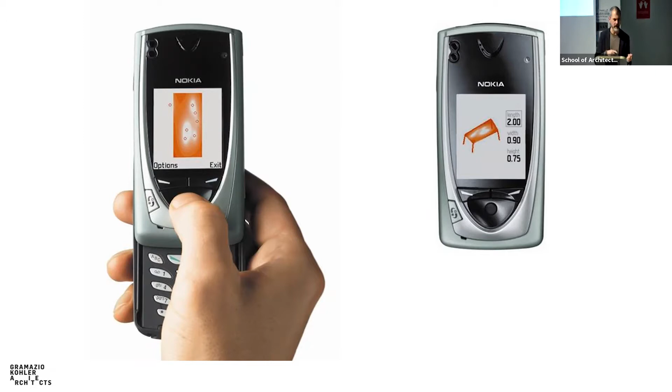And this is a mobile phone. Actually, this is a smartphone, the first smartphone, although it doesn't look like this. It's 2002. So no classical features of a smartphone, but it's programmable. This made the difference, because until this phone, a phone was allowing you to make phone calls, maybe play Snake, but that was it. And this one had apps. Of course, they were not called apps. Nokia didn't know what apps would eventually be. What is tragic, because they went out of business because of this, because somebody else came and invented the app, but they had it already.

And here I show you what this application that we programmed and distributed was allowing you to do. It had a 3D viewer, a very, very low res 3D viewer that allowed you to turn an object, a table, in space. And this would allow you to set points on a surface, and with the pressure of your thumb, to apply force on these points. And the force would, of course, deform the surface, and the deformation of the surface would at a certain point create a hole, just by an intersection between two surfaces.

So a set of very primitive operations in a very strange environment. We could have done this on a CAD program on a PC, but we decided for a minimal interface, for a device that was not felt as a computer, as a working tool, but as something else, something completely new. So you would eventually send this to our server. There was no cloud, so you had to send stuff to us, of course through the internet, but not printed out. But eventually you could have printed this out, because this is the beauty of this mechanism here.

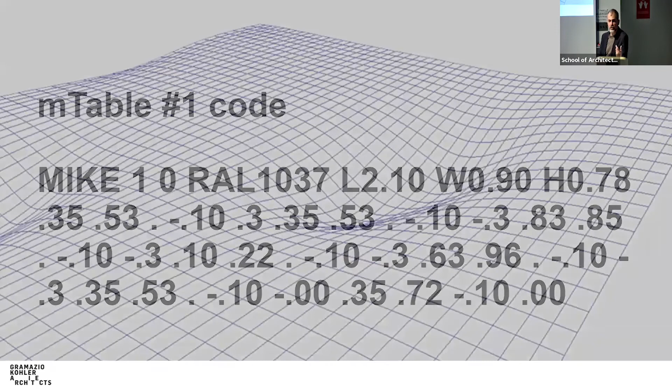These are the parameters to describe this object, the super complex object. And it's just a few, and they are even human readable. There is authorship, there are dimensions, there is then, of course, the XY position of these points and the magnitude applied on them. That's it. And with this information, if you have the algorithm, the rules of the game, the design, then you can reverse engineer this very complex mathematical description of a surface, of a NURB surface in this case.

And with a next step, that is also just a translation with a post-processor, you would produce machine code that will just cut this out of a piece of wood, walnut. So expensive, beautiful, heavy timber. And by doing this, you would add a few legs, and you would end up having these sorts of objects here that are unique pieces. Very elegant, beautiful, but at the same time, questioning themselves because they have holes.

And the whole point here was, or is, that these design features are not added by the designer. The designer gives somebody else tools to intervene in the form. So basically, this project is collapsing together a lot of points that back then, 20 years ago, were in the air: parametric design, configurators, the internet, the relationship between the author and eventually the client, that were, in our eyes, highly important to architecture and were not discussed at all, just ignored.

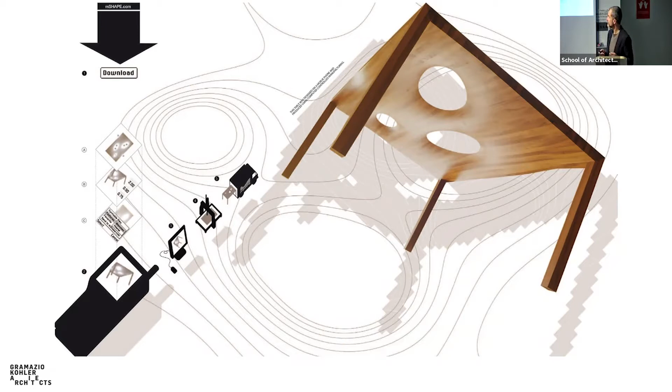So what did we have back then? We had digital architecture, experimenting with basically blobs, trying eventually to build them, not even so often. And then you would have everybody else that would just not care about the digital and its potential and its meaning for architecture. So here we closed this link in a very irritating and disturbing way, producing in the end a limited series of 10 tables, of course very expensive, but there were hundreds of unbuilt tables.

And this is a small cutout of this rest. Here you see, interestingly, that some are more elegant, more beautiful. Others are extremely ugly.

Probably wouldn't even work, although we had a nice algorithm implemented that would check for structural sanity of the thing. But what is striking for us, and this was also the message or the result for us, is you give the freedom to clients or laymen of touching the form, which is normally what designers hate, but at the same time, because they all look almost similar, if you design on the algorithm, so just one level up on the rules, you keep all the control you always had as an architect.

So parametric design doesn't equal losing control over things, and this was the great fear a lot of architects and designers had when confronted with the digital that was entering their profession aggressively. On one side not understanding it fully technically, but also fearing losing control over what we traditionally do.

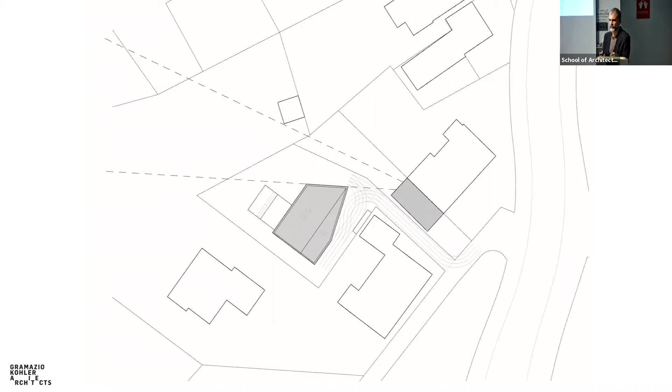You know, we can do this while eating, while talking, while taking a shower, while sketching. We don't need optimization. We can find a good solution. We can sell the good solution to the client with arguments, and that's it. Then we draw it up and build it.

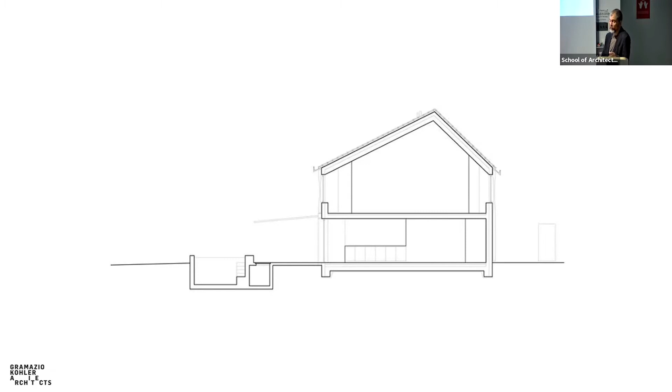Very simple. The slight small problem is the code doesn't allow any glass in this situation, or just a few windows, 1 square meter, vertical. This was what the client was looking for. So we used the trick that we already used a few times, and just cladded the whole house with vertical timber slats that would create the effect of a timber house, closed with no openings at all, but actually be completely open if looked at from the interior.

If you reason about this, you of course find out that this is sort of an engine, a perception, a viewing engine. It allows you to take a screen that is actually homogeneous, and to start to carve out portions of it that will, because it slims out, open up the field of view. So you play with the field of view. You play with very usual phenomena in architecture. So privacy, sunshade, what do you see, what do you hide, and so on and so forth. But it's not yet defined where and how. It's just a mechanism, just a parametric setup again that can be designed with.

Now, the small issue compared with the first parametric problem is that here we are talking about only 315 parts, which is ridiculously small as a number, but they all relate to each other, and they're all different in height, because it's not just a box, but a bit more complex box, and this roof is going up and down, and of course this processing of the parts is not related to an exterior drawing that you regularize, but it depends on the glass on the inside, on the spaces, on the program.

And here the only thing that you can do is to code. Just to be able to design it, you have to write down rules in a way the computer can interpret these rules and show you in real time or almost real time geometry that you as a designer can evaluate. Design being by nature an iterative process where you never know what you will end up with. The only thing you know is that you have to do something in order to be able to assess it and eventually change it. So trash it or improve it.

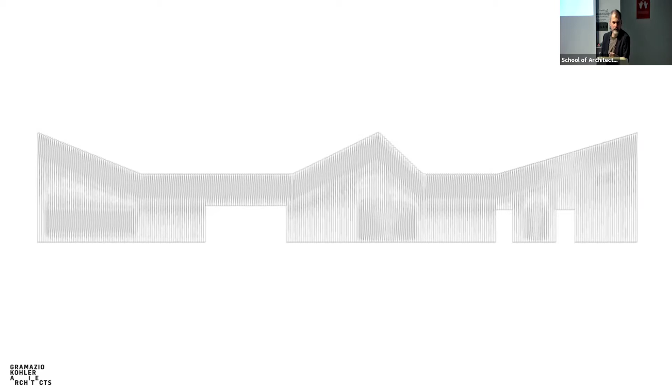Then it's clear that without programming, although we are all very good model builders, we also model in Rhino, we could model each one of these. Maybe we can be fast and do it in 5 minutes, but add up 5 minutes by 315 and then multiply this by 300. You find out you will not be able to design the way we are used to design. You would have to impose the system and a different logic that has nothing to do with the thing that you're looking for. And 315 is a small number. Okay.

And the second problem then is, how do you build this? Because if you have 315 parts, assuming that you have produced the data somehow by programming or by spending 3 months iterating, then if you would ask a contractor to produce these parts, he would say, okay, these are custom parts. This will cost a lot of money because for each single part, I have to measure them in and whatever.

Here's where the machine comes in. We had to find a machine that does exactly this and is controlled by digital data. And this is a machine that is very common, because if you order 315 identical slats of a certain height, they will pass them through this machine, because this machine is doing nothing else than cutting down the surface. First it makes it planar, giving the right height. And the second thing the machine does, because it's able to tilt this blade.

Second thing it does, it can incline the surface. It's extremely easy. Now, what is the consequence of this machine? It's that doing this with the data in it, processed with data, or not processed, costs exactly the same amount of money. I mean, I'm exaggerating a bit because there is logistics, but conceptually, it's the same thing. If you paint this stuff, then you need the paint. So you need to buy additional material that you put on it. So there is work that, if you buy it unpainted, is not there.

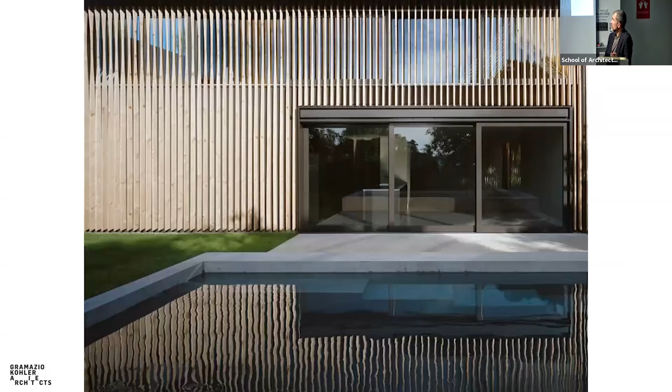Here it's the same machine. The only difference is the data that goes along with it. This is the result. It's very, very simple. And basically it's a perception machine. You experience it in moving through these spaces, seeing where it goes up and down.

Hey, Branko. Hey, nice to see you.

Okay, this was sort of the introduction, just to clarify where we come from, what interests us, what was the motivation to go where we are now, to start playing around with robots. This is then the next chapter, because this is not very conventional. It's implying a lot of nasty technical stuff that often you wouldn't want to do or to know, but the intrinsic motivation is exactly there. How can we transform architecture by making use of the data that is around us anyway, in the most elegant possible way, by instrumentalizing machines and our ability to describe processes.

Okay, now the robot. This is a few years now. I mean, it's about the same time, but in another context. This now is research. This is university, where we started in 2005 by buying this machine. And this machine is an industrial robot. So it's not particularly high tech, even back then. It's a mass-produced tool that has actually changed the way things are being manufactured. Cars, for example, cars we buy now wouldn't even be thinkable without these machines that started to be developed in this industry since the 50s.

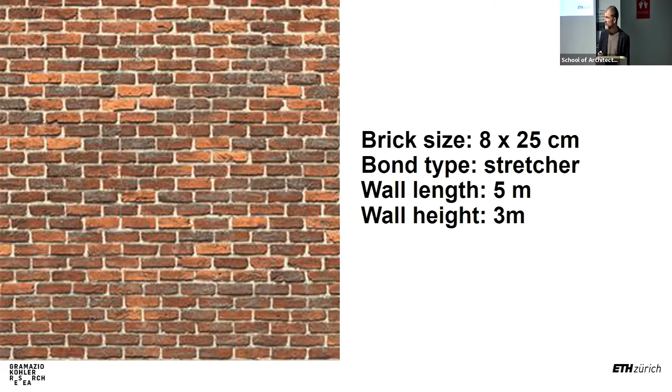And this is a cultural technological convention, the so-called bond type. There are many of them, more or less exotic, and stretcher is something every architect, but also every mason, knows; it's common knowledge. And stretcher just describes the rules, the process of how these bricks are organized and laid in space, so the position, but also the sequence. And this allows you to describe the whole thing with just a few additional parameters, the most important being the part to be used, the brick, and the dimensions of the wall. That's it. Extremely compressed, and there are not many misunderstandings compared with this one. And it's also not so hard to draw.

Okay, now what is the parallel of this tiny compressed notation in the digital, in an algorithmic space? For those of you that don't write algorithms but program visually with Grasshopper, this maybe is not trivial to read, but this is just two nested loops. The loop is one of the basic control structures in all programming languages you can imagine. And if you nest two, one into the other, then you repeat an action a certain number of times in the inner loop.

Once this is done, the outer loop runs, and this allows you basically to mirror what the mason does, because what the algorithm does is put brick next to brick next to brick until you have reached the length of the wall, then move up to the next level, shift by half a brick, and repeat. And repeating these two processes brings you to the finished wall. And this is not very exciting. It gets exciting if you look at this. Now this is the same algorithm, but there has been a small modification down here.

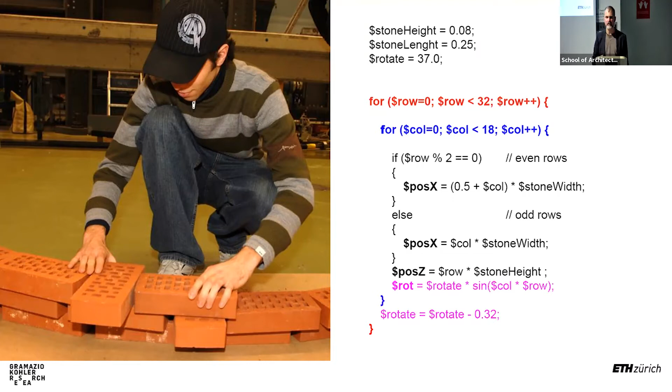The human now is on the left. The human is playing around with real bricks in space, wants to understand: can you eventually rotate? What can you do with these things? When do things collide? And then he writes these two very easy lines in the algorithm that is identical to the algorithm we have seen before. But it changes it dramatically, because before it was just the same thing as the stretcher bond, just in another notation. Now it becomes this, because it produces this output, and this is not a stretcher bond anymore.

I cannot go to a mason and tell him stretcher bond then does this. This is data, and it's so small because it's a lot. And for each brick you have a rotation. What is simple, but again, not easy if you have hundreds and thousands and hundred thousands of them. How do you describe it? So it's actually non-feasible anymore for a human, or at least not under efficient, architectural conditions.

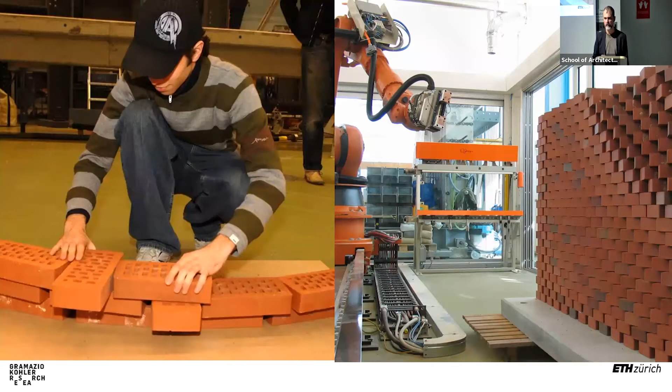But now this is the small trick to understand the relationship. The machine is expecting nothing else than this, different numbers, and the machine doesn't care if the numbers are all identical or all different. Does not notice it. This is the strength of the machine. And by directly coupling these two things, and this is now just one possible variant of this relationship, but it's a strong one,

we are able to directly link the human designing something, what means in this case to code to some extent, with the machinic act of constructing something, by leveraging on the fact that the machine doesn't care about what for us looks like complexity, but for the machine this is just simple. What is impossible for the machine is to understand what a stretcher bond is.

And what is also important for us is that digital materiality doesn't have to be, but often it's a very central thing, because it's not the digital world as we knew about these things already in the 90s, which was computer graphics. But this is just color on paper. Here these things interact with light. They are purely, genuinely architectural.

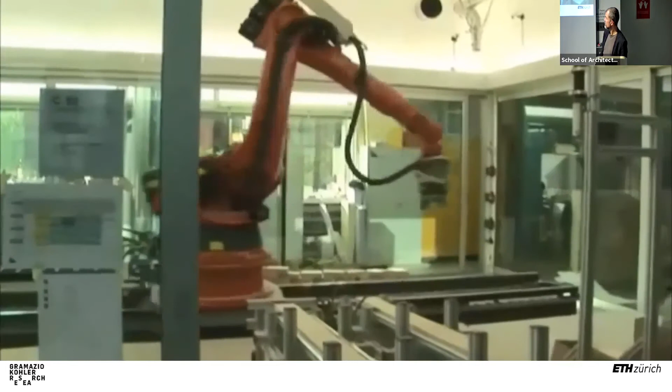We produced this at university. It was sort of a stunt because there are issues of liability and all those things, but sometimes you just have to do things even if they are not so clean, just because otherwise you would not do them.

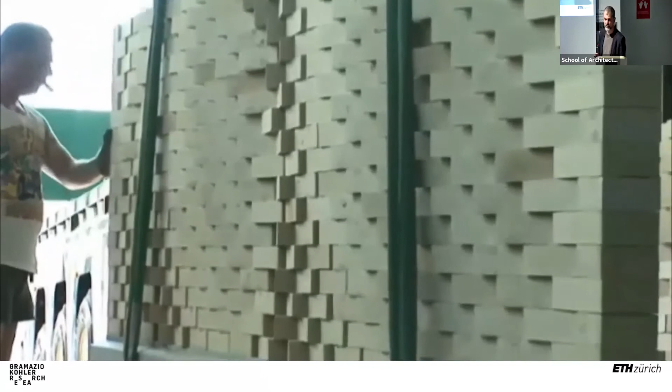Here you see, the process is super simple. The machine is placing them in space. It's a 3D printing process at a very, very low resolution. We used to say back then, just at the resolution of architecture, because the brick is an architectural element, and then these parts get placed, once they have been transported, just placed onto the skeleton of the building in a conventional prefabrication process.

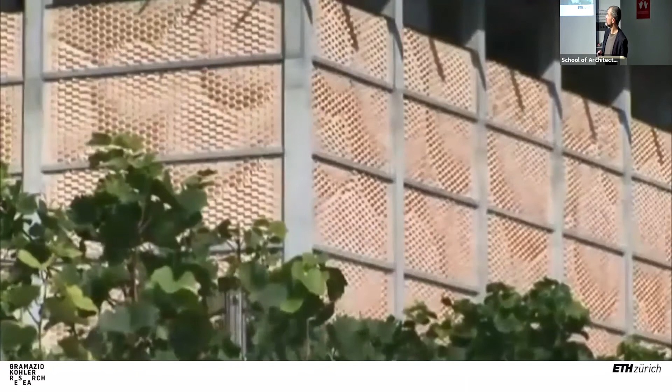Here are a few images. And just to remind, this is a building that is generated by light. This building changes all day long because the sun moves, and changes with the position of the observer, changes with the quality of the light, changes according to you being inside or outside. Because it's completely different physical phenomena that make it readable to your eye.

And the sequential roof is a project that is similar conceptually, although here these things become structural. It's a 2,300 square meter roof, like a canopy, for actually our institute's building. We were lucky, we got a new building, and we have been able to convince the board of the school to insert a small experiment. This is probably the only drawing that exists of this roof.

It's nicely showing that if you, at this scale, take 50,000 timber elements, 5 by 12 centimeters. I don't know now in inches. It's probably 2 inch by a little less than 4 or 5, something, I don't know. All of different dimension, and organize them in a proper way, so weave them in a proper way, you get a structure that is astonishing for us. That is consistent, but still malleable. Still stretchable. It's more like a fabric.

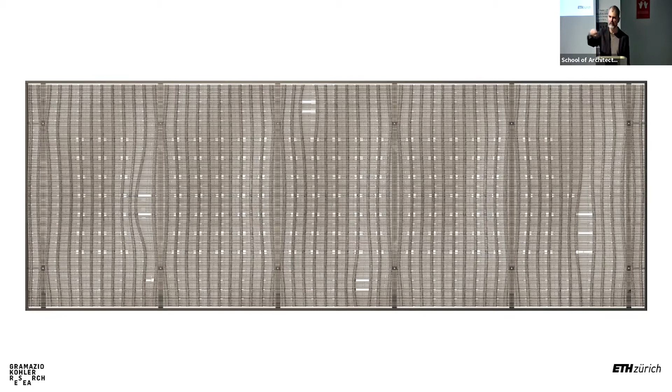That can adapt to special conditions. Like here, these are air ducts that have to cut through this thing. What you normally do is to cut out something from the structure, or have the structure running around such a situation. Here you just stretch it up, open it up, and have these things going through.

And again, 50,000 elements you have to program if you want to organize them, because before we were talking about 315, now it's 50,000. The only way to do it is to start from design rules. And this is now this part of the image. I will say, what are the things that I'm interested in? Which are the parts of the geometry that I want to control? How can I describe them? Can I describe them with lines that I can manipulate? Do I want to describe them numerically? Whatever.

And then departing from this information that you input, you start to build your design in the form of a program that then adds structure and eventually, and this is very important in these things, creates input data for structural engineers that can check on each iteration. Because otherwise the same problem would just be moved to the structural engineer; you cannot tell the structural engineer, I give you 3,000 models, and you model them in your structural engineering software, because it takes ages. So you have to connect these softwares in order to have this proof that it's working, or the information that it's not working and where it's not working, immediately. And then, at the end, it's classical BIM information where every screw is introduced.

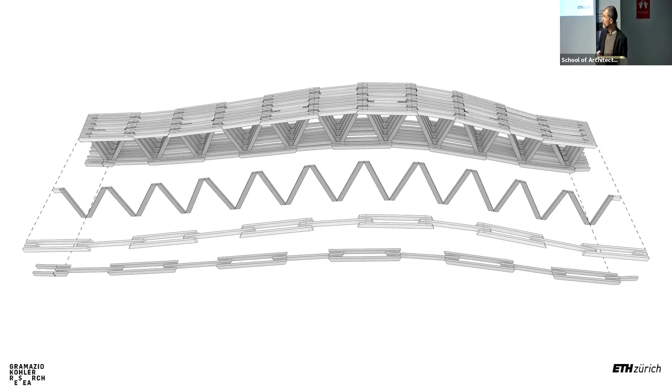The way this roof is built is pretty simple. It's big trusses made of small parts, 15 meters long, 1 meter wide, connected by almost 1 million nails. Now, the nail, this is a specific story, it's because the nail crosses two layers. So in order to avoid collisions here, you really need sophisticated algorithms that produce this information for the machine at the very end.

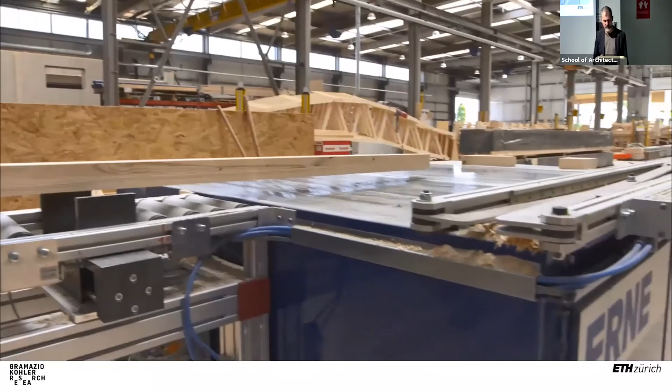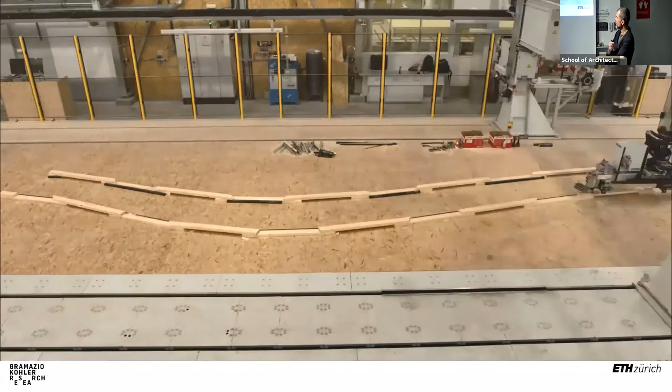To end up with a production process that is eventually as simple as the stacking of the bricks, because the only difference here is that the raw part, normally 6 meters long or longer, this slat is processed, cut at length and at a specific angle, and then laid out by just a big robot on a big table. And the robot has not only the ability to deposit these parts, but also to nail them down. So it turns the end effector and then has this very common tool on it. It is just a nail gun, and gives it the nail.

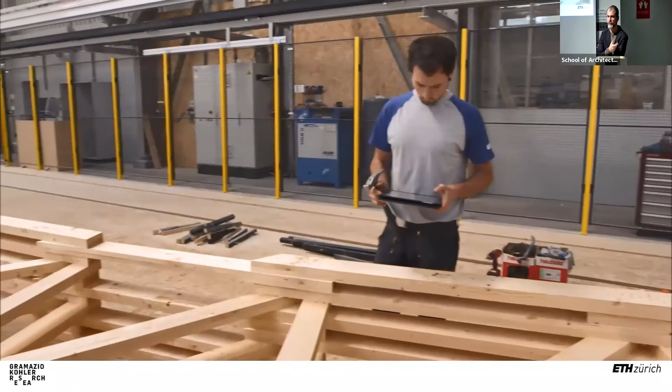And all this information has to be produced before, because this machine is not doing anything if you don't tell it where to nail. Because all of these geometries are different, or can be different, it means also that each connection has a specific number of nails and a specific position for those nails.

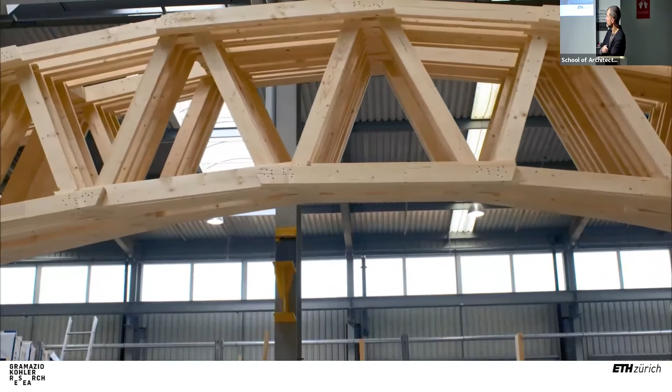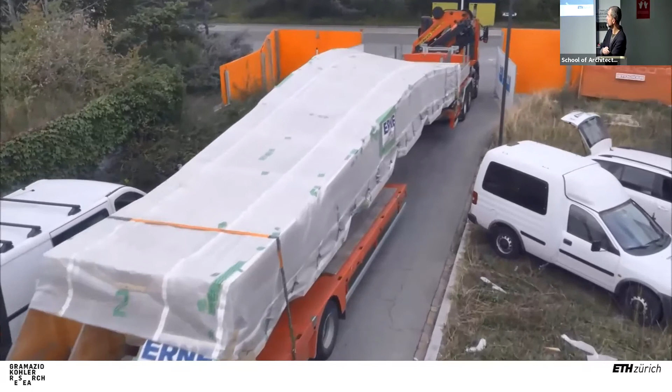And then at the end, these elements are craned away from the printing bed, installed. So all the subsystems can be installed, but it's very important here because if they're all different, then it's better if you can do this in the shop, transported to the building site, and then craned into position.

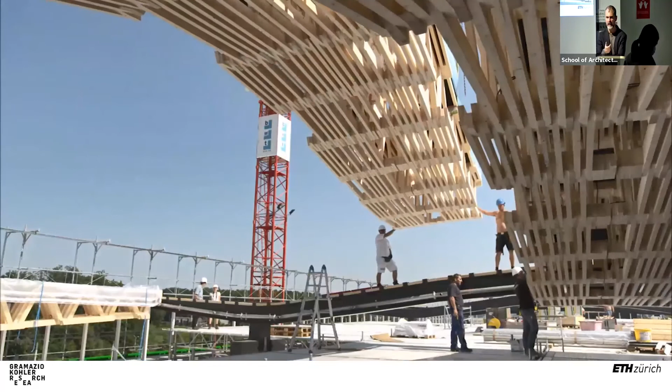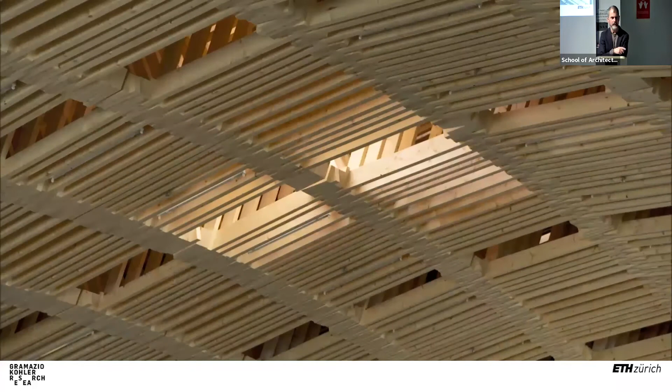And this last step is extremely simple because you cook down 50,000 parts, 1 million nails to 168 big elements that can be very simply placed and fixed with a few screws, and that's it. And all the subsystems are in. So it's really about condensing a large number of pieces with the help of algorithms in the design process and machines in order to simplify this last step that has to happen on site to a maximum.

Okay. Now, these were two projects that are not super old. The last one is maybe 5 years old. But I wanted to move one step forward from this and show you two projects that we looked at in the last 2 years that work with augmented reality. At a certain point, we realized, more by chance, because we had people in our group that were looking into these things,

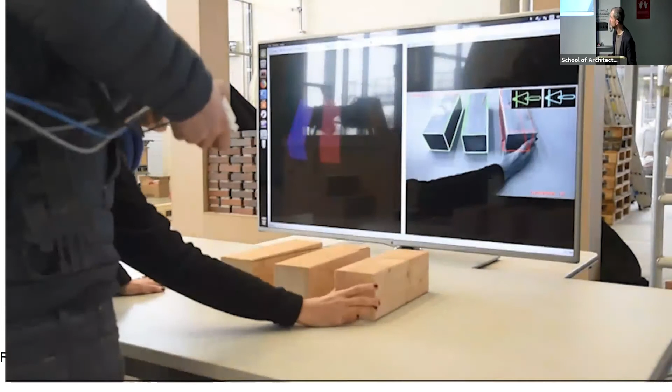that we had technologies that basically in principle do the same as Pokemon Go does, just project something in your visual space, so in your physical reality, but that with the right tools, the right sensors, the right camera and the right algorithms, by tracking the position of real objects in space and by extracting the features, so the edges, you would be able to build tools that could run on a screen like here or on goggles, it doesn't matter, that would allow you to guide the human to place parts in space.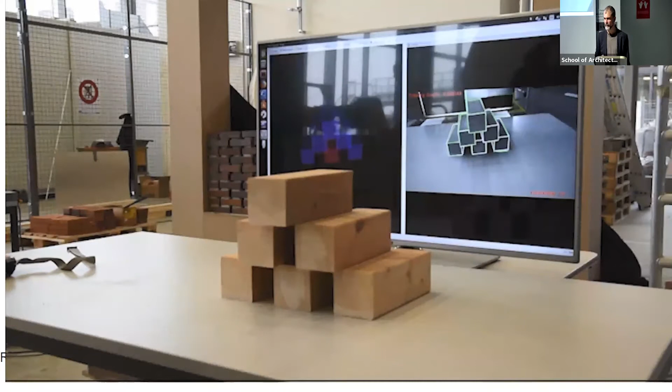And this is pretty radical, because now the difference we were discussing before between the human and the machine, where the machine is this tool that doesn't care about where things are in space, that doesn't have to measure, here changes. It just becomes a more complex matrix, because suddenly the human too is able to do the same thing, just by being instructed by technology, by a machine.

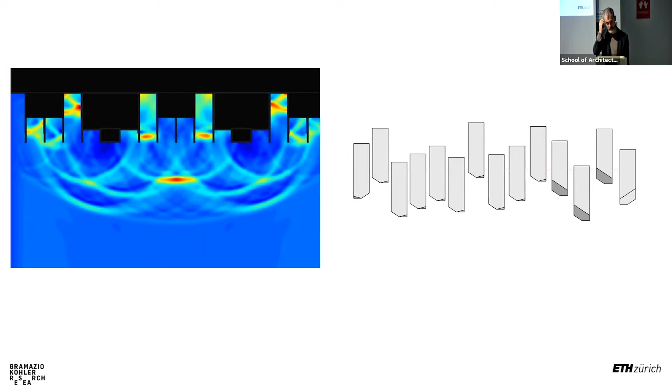So eventually we did the first project that was fairly simple as a proof of concept. It's a diffuser, an acoustic wall. We designed a timber piece. It's one piece that can be rotated in 4 positions. A diffuser works with depth. So you basically create depth pockets where the reverberation of the sound is just not synchronous anymore. So the sound comes back from different distances depending on the wavelength. This creates a phenomenon that is pretty important and interesting.

And then we add again an algorithm organizing these produced parts in space. And then this was an extremely interesting experiment with people, not with our group, which would be completely biased, but with people that normally do this kind of thing, giving them these very simple tools, a camera and a screen, with which they could start to deal with the data on the left that otherwise would be prohibitively complex and slow. And we were able to produce this as a proof of concept fairly quickly and in a simple way.

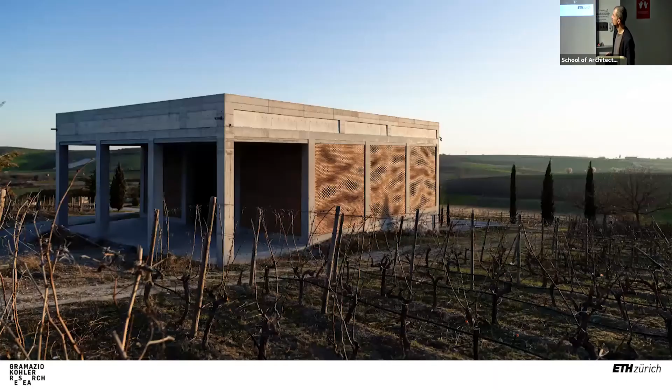And with this proof of concept, we transitioned to a second project that by chance came in at the same time. This is a winery in Greece. And the very interesting thing about this winery in Greece is that it looks very similar to the winery we already did. It's a concrete skeleton. The bricks are fillers. The bricks are screens, where air has to go through, but not direct light.

There were even more parallels. The client here was also an engineer, like the first one, Gantenbein. So somebody that changes profession and starts to produce, in the case of Gantenbein, excellent wine. These guys here are starting, but I think they're ambitious. But the big or small difference is while Gantenbein was produced in Switzerland by a robot, this was produced in Greece on site by masons. And if you look closely, you see in this design here we have features. For example, we have mortar.

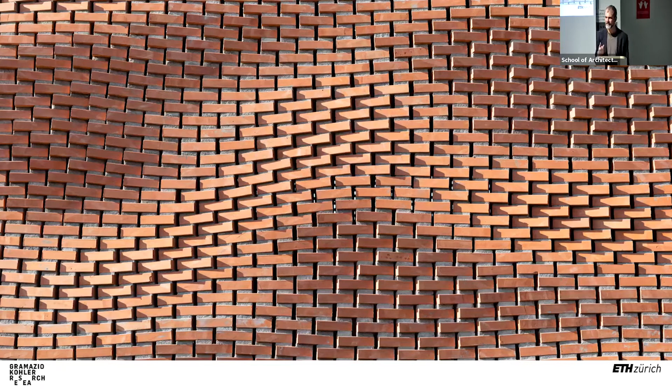Gantenbein didn't have mortar for a simple reason: a robot is not able to put mortar on a brick. This is an extremely complex craft. This is dexterity. This is knowledge. And so we had to simplify, to abstract this process. It was nice. It was like a dry wall, with glue, questionable.

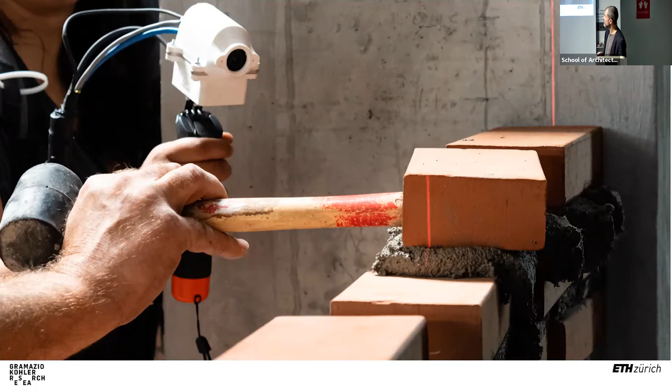And with this process here, by being able to use the mason and his knowledge and craft, we have been able to reintroduce the mortar and even push it one step further by starting to modulate the amount of mortar. Here you see the working setup. Of course, it's very experimental. The whole hardware was just prototypical, but it worked.

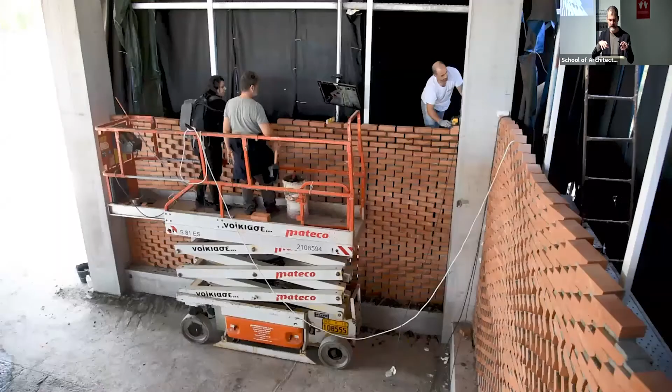We were able to provide the mason with all the information he was missing, sort of to adapt the interface in a way that it would fit to the technique. They place the mortar, then they place the brick. You will see it here, yes. And then, with a best guess, they place the brick on it.

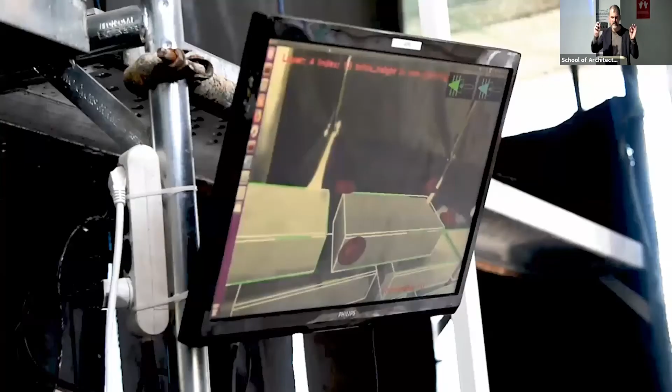And this is a thing that they always do. Even if they do a straight wall, they put it there. And then, with the hammer, they normally tap. And they're very fast. They know if I tap here, I can move the whole brick, translate it down, and squeeze out more. Now with this visual interface where he sees the difference between where it should be and where it is, and he also gets with these green arrows a visual feedback when he taps, if it's going into the right direction, they are able to connect these things.

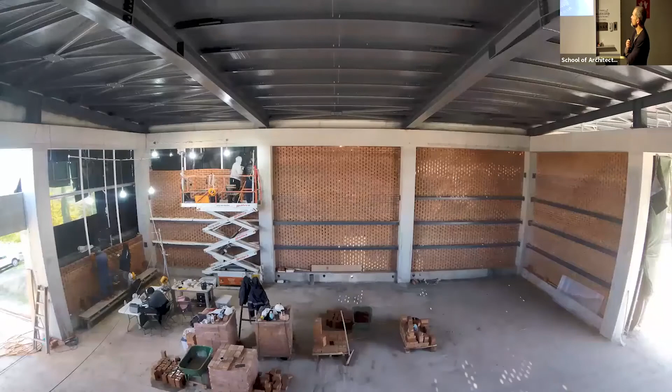Now, this, of course, has a lot of implications. Probably we'll discuss at the end. What are we doing here? Are we roboticizing craftsmen, or are we reinventing craftsmen? It's very, very ambiguous, but very interesting.

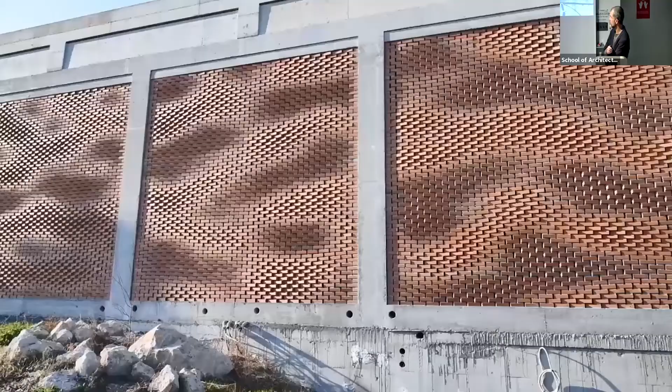Okay, let's move forward. Now, concluding, I would like to move quickly in another direction. Now we are always talking about building materials that exist and that we are used to employ, that have a structural history that can be calculated, that are precise, that can be stacked, and so on. Now, I would like to show a few examples of material self-formation, because this is a sort of second track that can be addressed in an interesting way with algorithms and machines and feedback systems.

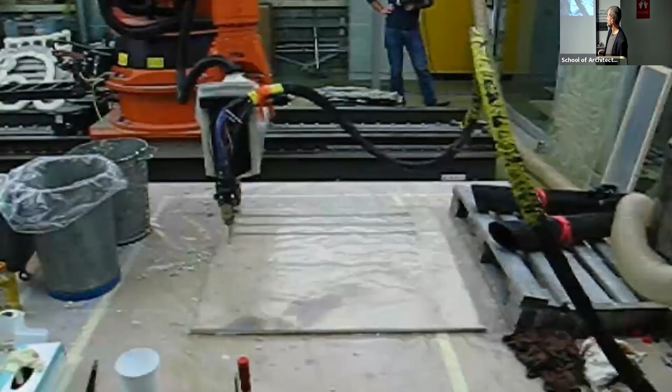What you see here is an old, very, very old project, 2007. This is depositing or printing foam with a robot. Polyurethane foam. Polyurethane foam is a two-component material, as you probably know, where when these two components get mixed in the nozzle at high pressure, they start to react. The chemical reaction is started, and this chemical reaction lets the foam up, so change its volume, and of course turn from liquid to solid while foaming up.

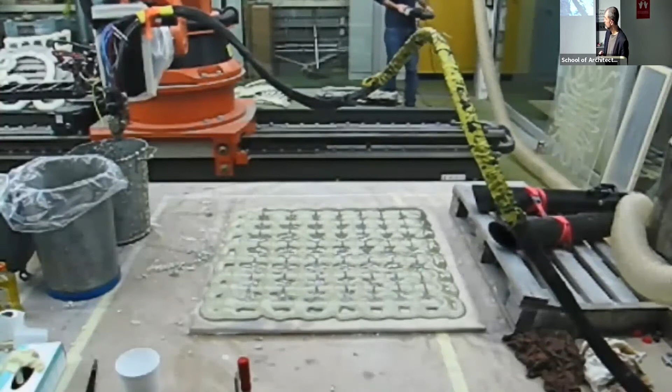This is actually what you see here. It's starting slowly. It takes about 2 minutes. It starts to emerge. Here. So you see this material has a behavior. It's not just a brick that you have to put somewhere or somewhere else or one on top of each other, but this material, and this is a particularly complex thing, has a way it aggregates when interacting with others. This we'll see later. This material transforms itself in time, and not in a 10%, but 90% ratio.

And if you hadn't seen the material in the movie I showed you before, and if I hadn't told you that this is polyurethane foam, then you could not understand the relationship between these things. This is because there is a lot of information that you need to design this that is not included or explicit in there. And this is the speed you move and the sequence. The most important thing is the sequence, and this you see on this second one. This is again input and output.

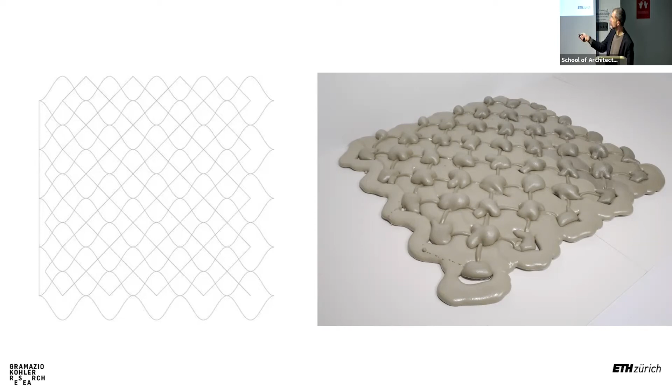And when you move with the second line, with the material over it, then it will flow down along this profile to the left and the right, and accumulate here, and in this part here. So this is the leftover of what flowed down, and this is interesting because it's just a result of a sequence. But this sequence is not random. This sequence is included already in here, just not visible, not explicit.

Now, if we go to material systems that are a bit less complex, so we decided to abandon polyurethane foam because it was incredibly complex and also not very healthy. So not a good thing to do with students. And we found sand is as interesting as polyurethane foam, but a bit easier to handle and fully reversible. This was the second attractive point to us.

And again, with a very simple process controlled by a robotic arm, and in this case, a small sensor that measures a distance. You are able to create extremely interesting, fascinating morphologies that are just based on movement, speed, sequence, and in the case of sand, height. Because depending on what height you have the nozzle dispensing the material, you add more kinetic energy to the sand, and eventually it will disperse in different ways.

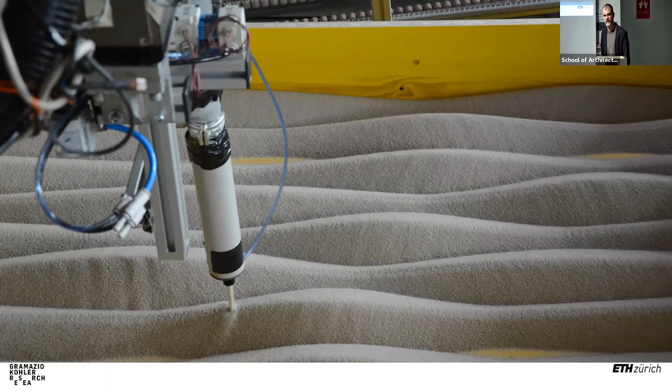We've done a bunch of these experiments, and then at a certain point started to think, okay, well, how can we use this? Because sand is nice, but it's completely ephemeral. You cannot build anything out of it. It's probably also the beauty. And we decided to use it for fully recyclable molds. And with students created these boxes in which we printed sand.

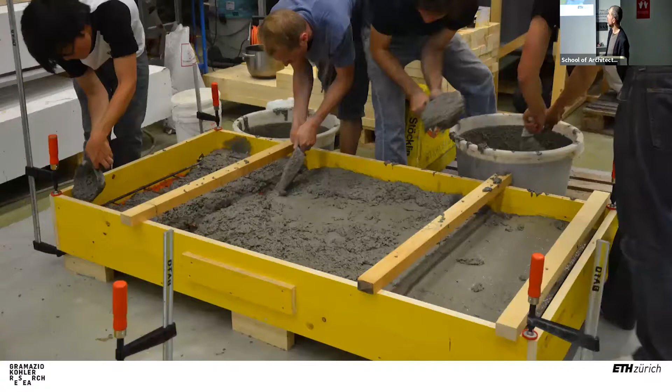Then with latex, we sprayed a sort of 1 millimeter coat on it that then allowed us to put concrete on it. And if you would put it gently, we would not move the sand away. And then you would decast and pull away this latex skin and end up with extremely interesting architectural pieces, very thin, that created literally no waste beyond this super thin skin of latex, because the sand you can directly re-input in the next one.

And this is a principle that has become very important in our research over the last years, because it's evident that what we have to do in the future is to avoid, first of all, CO2 expensive or intense material, but in the best case, avoid using things only one time. We need to be able to recycle as much as we can. When we build, possibly use elements that have already been built, but when we design also, have the next iteration already in mind and as part of the design.

And this is, of course, a very complex thing. There is a lot of discussion going on worldwide. There are many different approaches. And we decided to attack it, first of all, from a bit of a conceptual edge, which is, it's not yet clear how we could use it, but I think it's very interesting because it shows, in the most radical way possible, what we talk about, what the goal is.

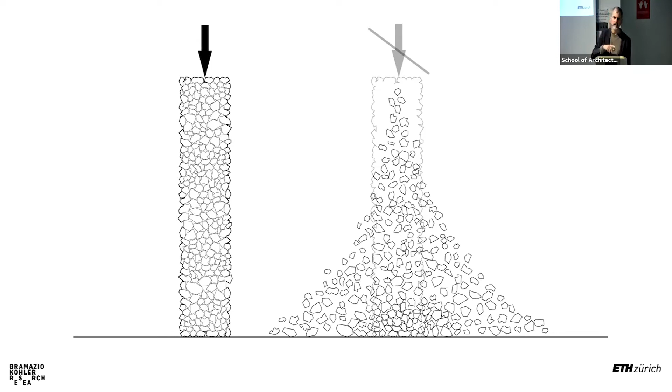But by taking the force or the boundary condition away, you can also liquefy it again. So the jamming condition is interesting because it can be passed in each direction as many times as you want. This is rare in architecture. You can play around with cornflakes. Simple. This is good to understand that it's very much related to geometry. This wouldn't work with spheres, for example.

There has been a lot of research by Achim Menges, for example, on jamming, but they were always looking at designing the parts, finding the ideal part. We said, no, let's think the other way around. What is the material that we have lying around everywhere? It's this. It can be processed in several ways, but actually it's stones, it's gravel. And although it doesn't have the ideal geometry, it's not like cornflakes that just jam on their own, we believe that we could make use of this.

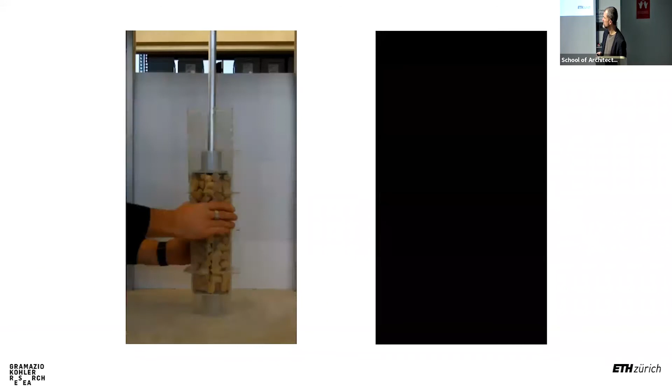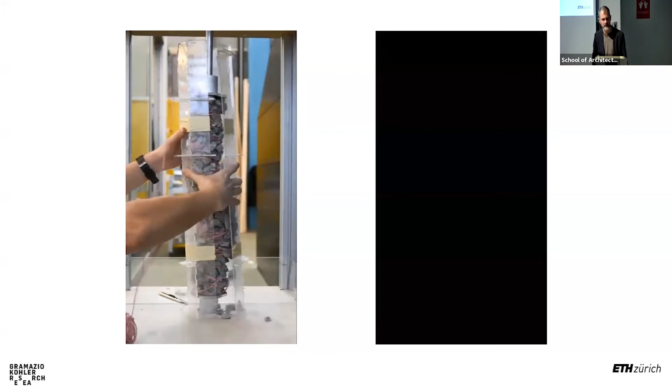And here you see how we started. It's always very playful. We did this with Skylar Tibbits and his group at MIT already a few years ago. A workshop where we tried every possible combination. So we knew that the gravel alone would not work, that we would need some additional material that we would add to it. And we just went through experiments. Then, slowly we got better.

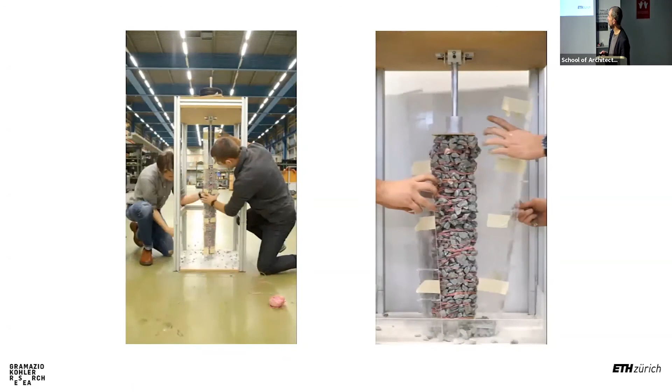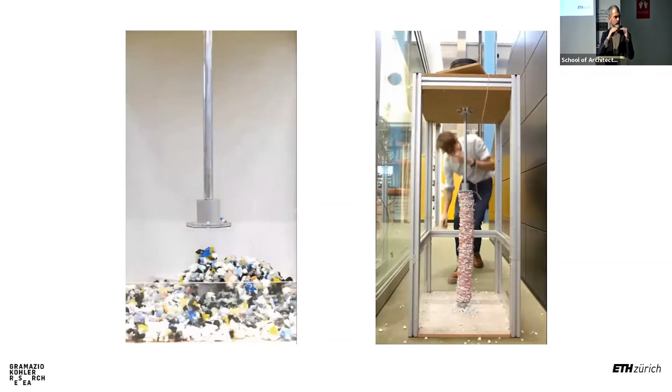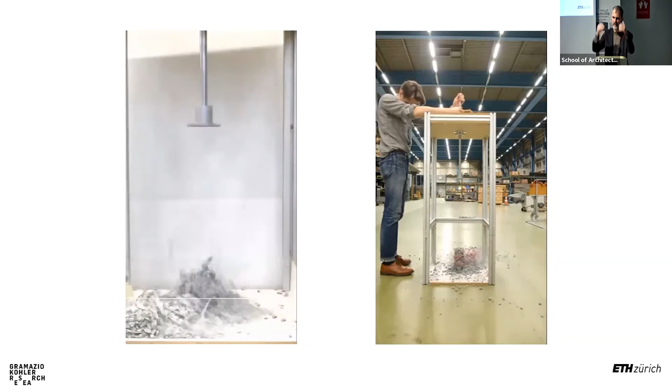We started to be able to add load on it. This was when we started to add just string, low quality string, into the material with a layer principle, by actually only creating internal friction. Because if we would have enough friction to make sure that the last layer of stones would not fall off the surface, creating a chain reaction, but if it would stay in place, then we would have it jammed.

So basically, at this point these were the ingredients of our game. We have done a lot of experiments in order to see if this would possibly work, because we had an invitation for producing an installation for the Chicago Architecture Biennial. This was 2015, the first edition, and we wanted to do something with this material, but it was absolutely unclear if this would work in a public space, in a museum, in the US, liability and all this story. So we had to very carefully investigate this.

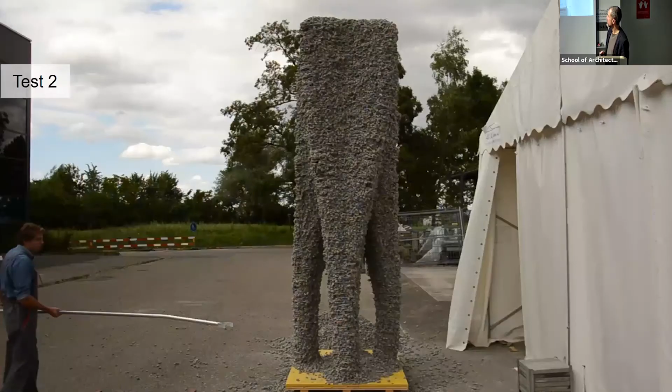This was the first prototyping of the final installation that was just built to test its robustness and resilience. And here it's very interesting, because you see how this thing, although it's extremely slim, readapts. It takes a long time until the equilibrium is gone, and it reveals what it actually is. Just piled up material. Actually, it's like the heap. But there is this construction process behind, and there is this string that holds it together.

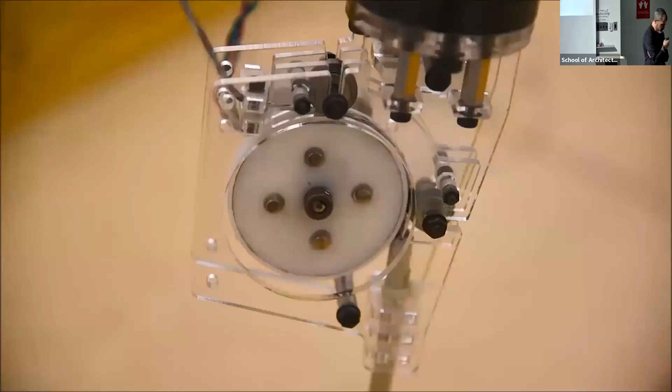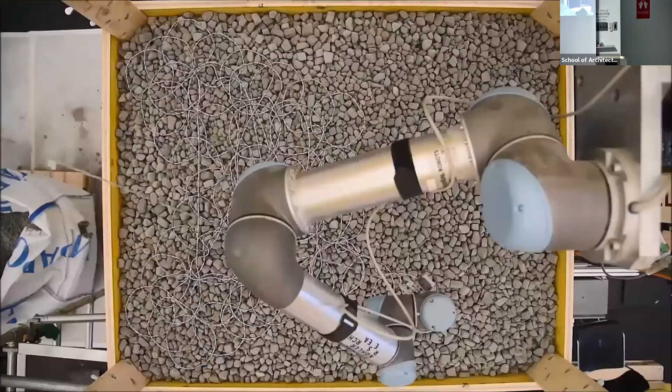Here you see a movie of the final object, where you see how it was produced. This is recycled string. Again, it's very simple. This string would never work in reality. This would degrade. But this was not the point of this installation. The point was, let's take the simplest possible materials, aggregate them in a specific way, and have something very performant. So it was printed in layers, up until it was 4 meters in height. And the patterns were all about distributing the forces in a possibly very even way.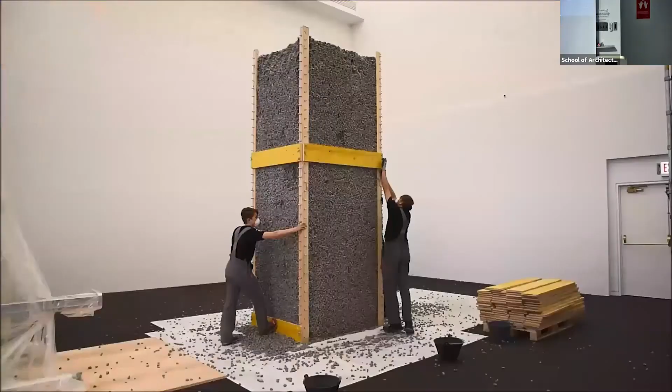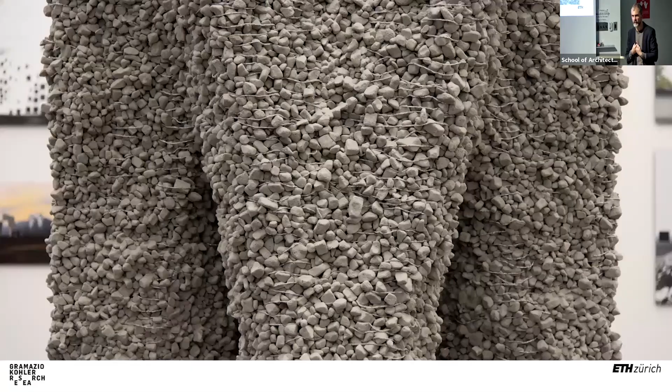Then we demolded it. You see here you have jamming still in place, but it starts to collapse. Now this boundary condition is gone. Now it's a block of material, and now by using the design property, because the design is very simple. It's a column, where three quarters of the mass is placed as high as possible, and then it ends up with very slim legs, 4 legs. And it's about putting the maximum pressure, because pressure is what lets it jam, onto these slim legs.

Here you see the material quality it has. It's interesting because you could destroy it just by caressing it. This is strange for architecture, because normally, just by hitting it, it's hard. But if you caress it, it destroys. And then this was the logical consequence at the finissage. I don't know if this in English is the same. At the end of an exhibition, when you make a party in order to maybe sell some art, or say thanks to everybody and so on. Here we decided to just run the process in reverse, to reconnect the string, and to show how this complete separation between the two ingredients could possibly be.

It's interesting that it's so controlled when you demolish it that way, when you pull out the string. Yeah, it's actually extremely slow and controlled, because it's like a movie, you know. You let it run the other way. As long as the string is attached to the ceiling, it can only go straight up. Yeah, and then it goes down to a pulley.

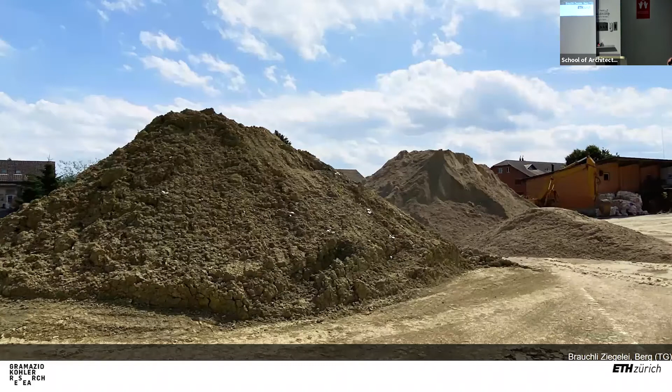Now the very last project that I want to show, and this is also very new, it's from this year, deals with earth, with clay. Clay is an extremely interesting material. You see it here in its raw state, before being mixed together with water. This is already mixed, extruded in a cylinder, cut in sections; we call them malleable bricks. And with this process, we have already done an installation, probably similar to the Chicago installation, where it was unclear what relation it would eventually develop to architecture, by throwing these parts in space.

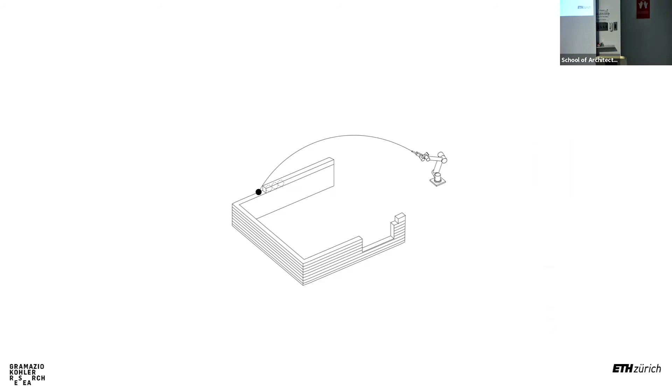Here you see a diagram of the idea. This is the physics behind. This is known, although everybody knows that this is not very accurate. Of course, physically it's accurate, but you cannot really use it because there is wind, there are a lot of other factors making sure that it will not land where this diagram tells you.

So the thing that you have to do, and this is a thing we have nowadays, sensors. You set up a feedback loop where you shoot something, you observe, register, track where it lands, and then depending if it's good or bad, you adjust your remaining parameters. For example, the inclination of the shooting mechanisms and so on.

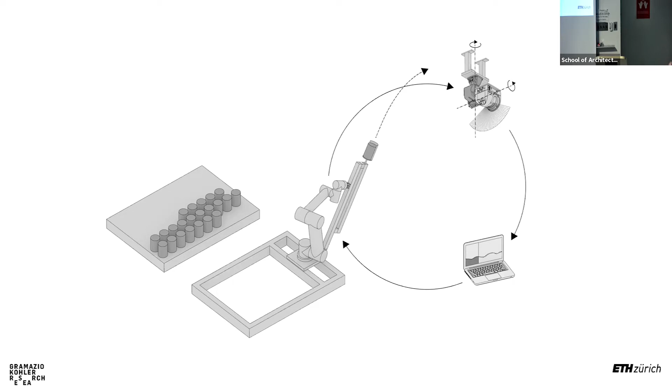This actually is nothing new. The whole military technology has always worked with feedback processes, be they digital or manual, just observation. That is the way something like this always worked. Here you see the sensor in the setup, and here you see the process.

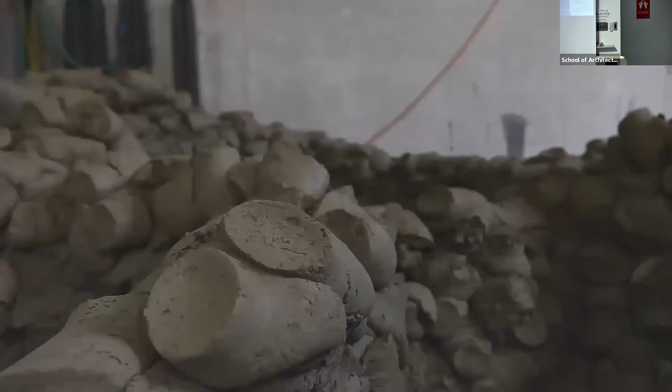It's very straightforward. You would assume that this ends up just in a big mess, a big heap of material, but actually it's not. Here you see the information from the scanner, which is processed at each iteration. Here you see the material. Here you see the landing of the material, and here you see the result. And actually, this is really much under control.

If you think of how one of these objects is just thrown in space and just rotates through space, ending up with this is pretty impressive. And the beautiful thing is that, and this is specific to this project, this loss of control when throwing is still readable in the artifact.

Because if I go close here, first of all, the brick being malleable exploits its kinetic energy to find its place automatically. So the fact that I don't have full control on where it lands is mitigated by the fact that it will sort of close the gap. And if it fails, then the next one will close the gap. So there is also a statistical mechanism at work.

But when landing, the deformation will tell where it came from and in what sequence. Has it deformed when landing, or has it been deformed by something else? So these are extremely interesting structures that you would not design. It's just to give you an idea of how you would want to control this and build the most sophisticated end effector.

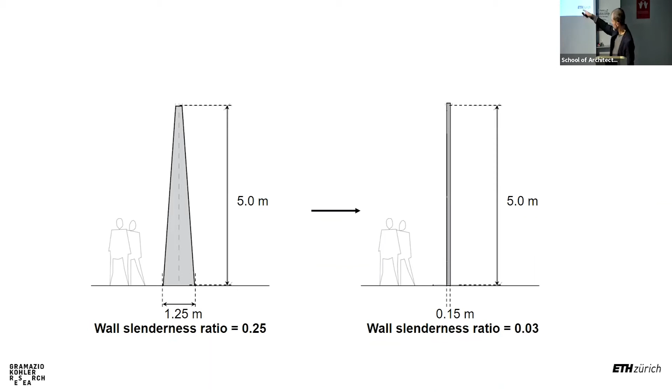And we found out very quickly that on the left you see what you would actually need in order to go up there with this material. And if you calculate the mass there, this was completely out of scale. It would have taken a year to produce this thing. So we decided, okay, we want to go with just one layer, so 15 centimeters up there.

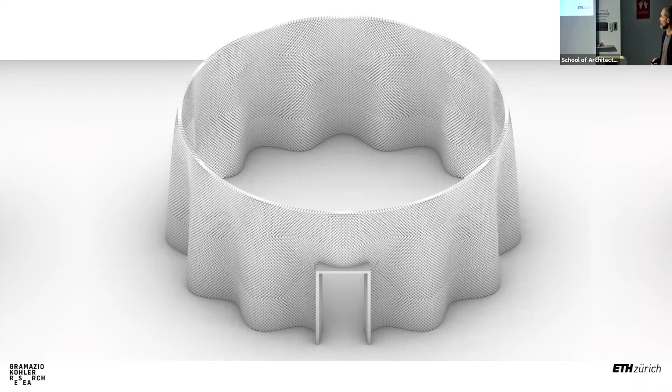That doesn't sound so reasonable unless you work on the design and start to deform it, give it the structural depth that allows you to balance out these things, ending up with this very simple archaic shape with one entrance. That then had to stick to the process that we have developed. We did this with an industrial robot. You will see it in a minute.

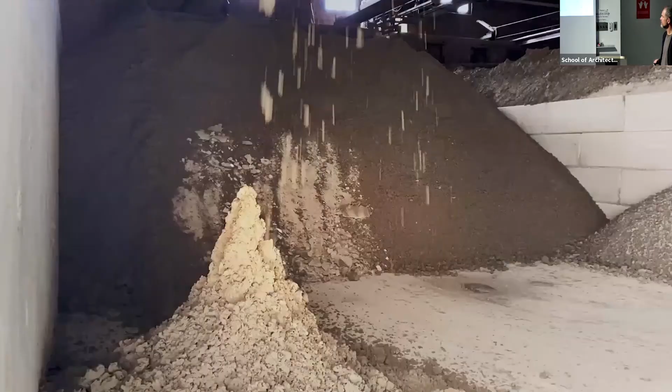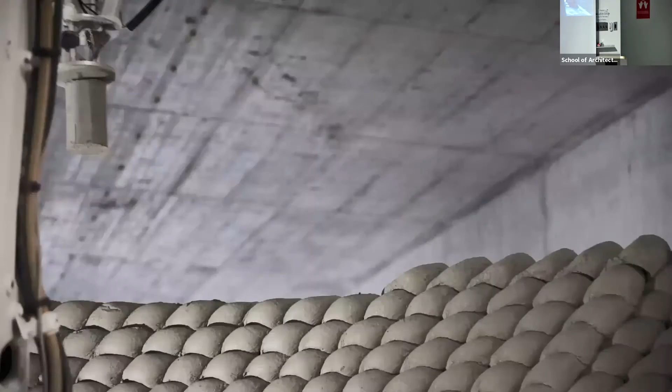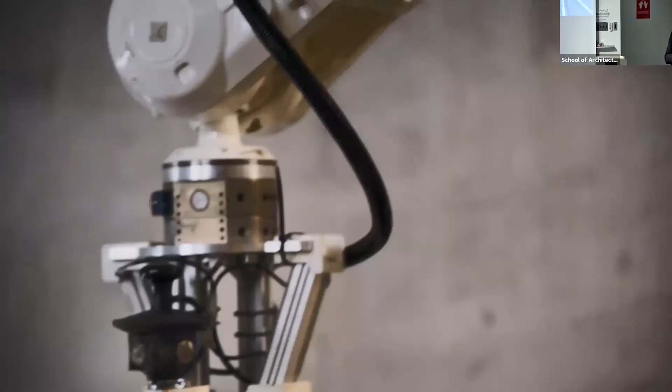Now you see here what the machine does. The machine now, with a great deal of control, can push this soft brick into its final position. Now, what has been very interesting to us is that this is clay. It's super thin and it's clay, meaning this takes about a month to dry. And during this month, this 5 meter high structure is in movement while building, but also when it's finished.

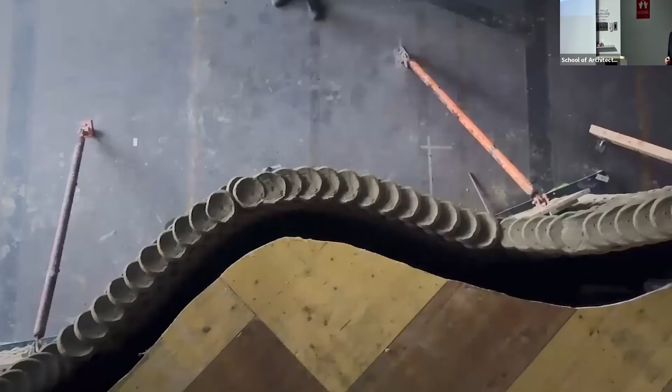So you don't only have to design its final geometry and make sure that this final geometry will be stiff and stable, but you have to look at all the possible intermediate states it can have. If something deflects, you have to intervene while building and at the end, because this shrinks and creates cracks.

And this is a thing that you need to start to accept and incorporate in your design. You have to work with this pattern that is just expressing the way it was built. And then you have, and this is more in general, the beauty of working with such a material that is literally, like the jamming project I've shown, fully recyclable. You just grind it down and you can build something new with it.

It has no hydraulic binders or whatever. Just water that evaporates. But you have to entertain it. It's designed for decay. And this decay is just visible very quickly, because if the humidity changes a bit, then you have cracks.

And now it's not so related to digital fabrication, but also to digital fabrication to a certain extent, because in our way to conceive digital fabrication, these materials are part of it. Digital fabrication is not exclusively about high tech. It's not the new world, the technocratic solution to everything, but it's about re-enabling solutions that often were already there, like the materials or the process or knowledge, in the case now of augmented reality, where you start to reframe the relation between humans and machines, not in the paradigm of the industrial era anymore, but in a new relationship.

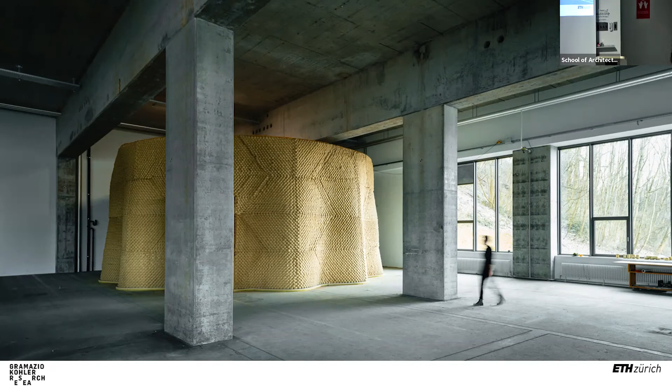That sometimes, if you're looking for money, can be productive, but for architecture and for answering the big question on how we are going to build the world from now on, because we have to change fundamentally the way we use materials and processes and resources and labor and so on, they don't help in any way. Because just having things automated doesn't make architecture better, doesn't make it more interesting, doesn't make it more sustainable, just like this.